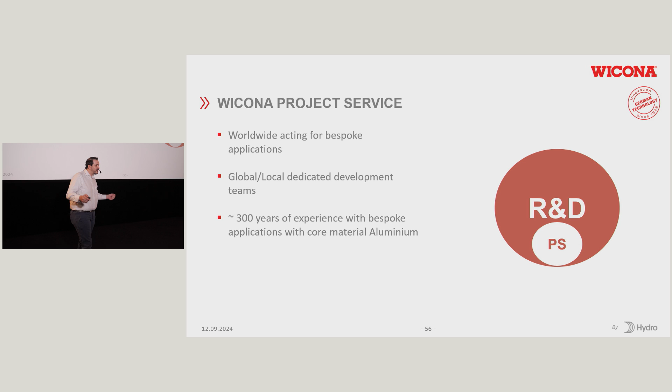In the team, we are collecting more or less 300 years of experience in the business, combining the experience of all the employees. Being part of the R&D of WICONA, we also have the opportunity to use solutions that are not yet developed or officialized in the market before other colleagues.

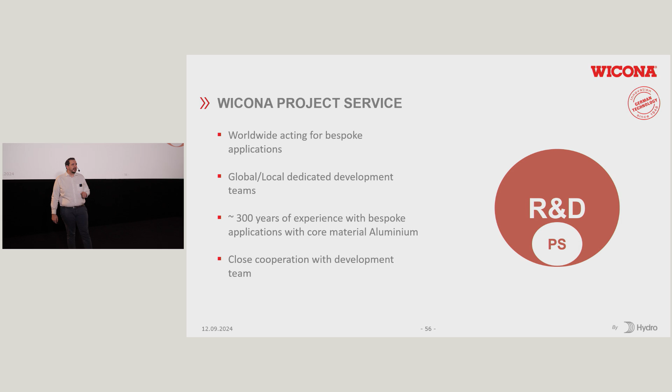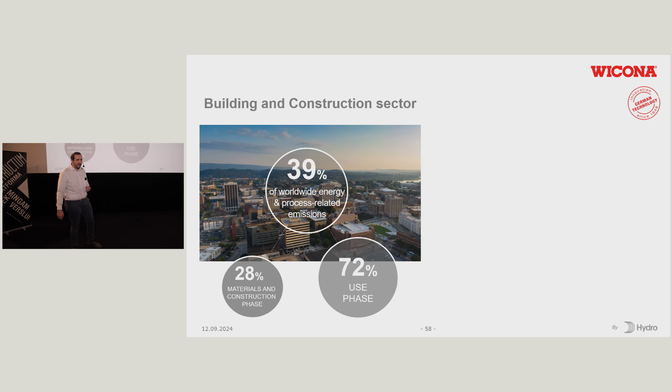But before that, I would like to talk about sustainability, which is an important topic. Before, we were at 37%; in my presentation it's 39%. Importantly, one-third of global emissions are because of our business.

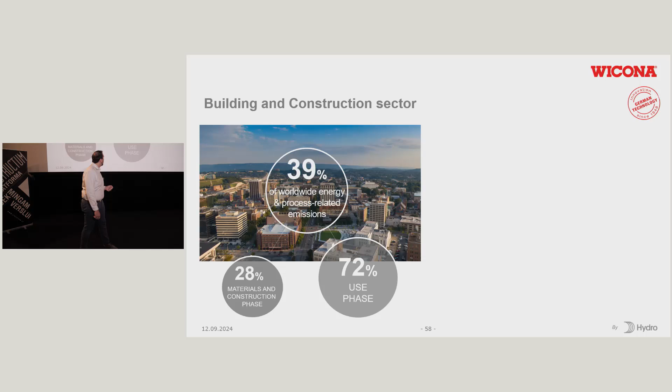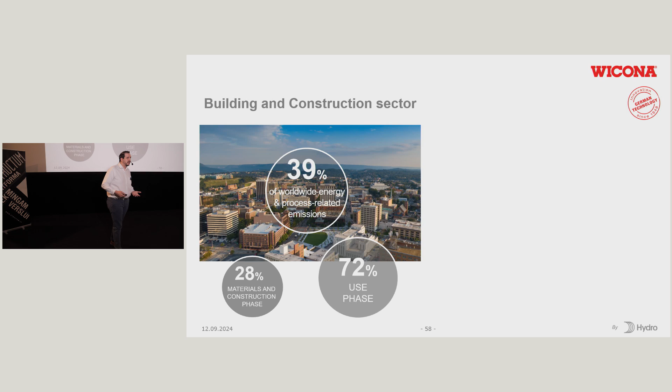Normally it was divided 28% and 72%: 72% for the usage of buildings and 28% related to the production of materials used to build the building itself. Now, with all the improvements we've seen, more or less we are at 50% usage consumption and 50% on the material side.

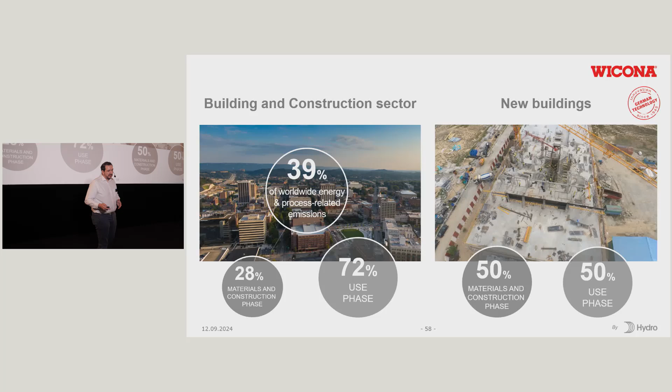Here I have two different projects. This one is the Office of Environment and Energy in Basel, Switzerland, where we have done a nice closed cavity solution, super well thermal performing, U value 0.5, sound insulation 58 decibels, a super nice development, and solar panels on the rest of the building to save energy and produce clean energy for the building. On the other side, we have 2 Trafalgar Way, a project I will explain in more detail later.

That is a passive house building for cold temperatures, meaning the solution we developed is for 0.6 watts per square meter Kelvin. Both of these projects relate to the 50% of usage of the building, improving performance and thermal transmission of the systems, reducing this value.

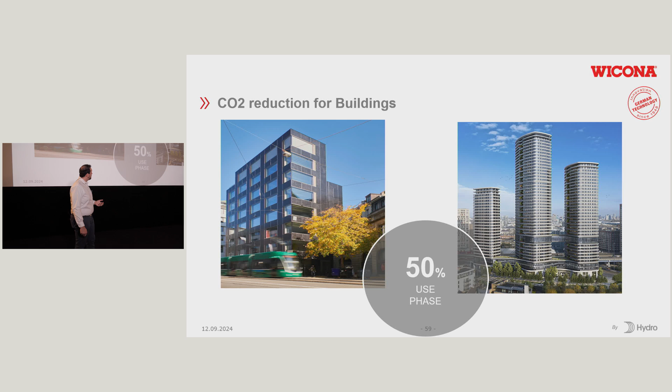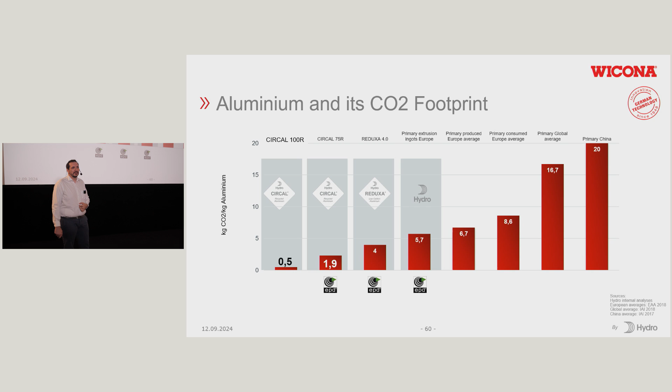On the other side, we also have to take care of the materials we are using. As WICONA, we have decided to use our CIRCAL 75R, which is, as you can see here, a low emission aluminium. We have decided for all the standard series we sell worldwide to use our low carbon aluminium for that reason. We are trying to do our part on this side, and I would invite you to also support us on that.

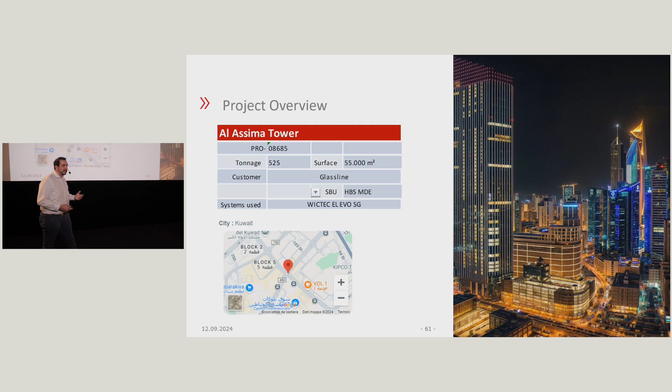This is the first building, Al Assima Tower in Kuwait City, a 310-meter high building with 55,000 square meters... of facade, not including the podium below, which is a different case but was also done by us. Here we have some renderings of the building and some important information.

As you know, floor deflection has a main impact on the design of the system. For this element facade, we considered plus or minus 19 millimeters, meaning the joint between the two elements has to allow this kind of movement. We also had plus or minus 4 millimeters for lateral movement of the element, and a high wind load of 6,000 Pascal, which multiplied by a safety factor of 1.5 makes 9,000 Pascal for the test in the test center.

We had the lamella applied on each element with the lateral wind load of 1,700 Pascal, on in and out corners. All of that was tested based on American standard, which normally requires almost twice as much water resistance as the European standard: we have 2 liters per square meter in Europe.

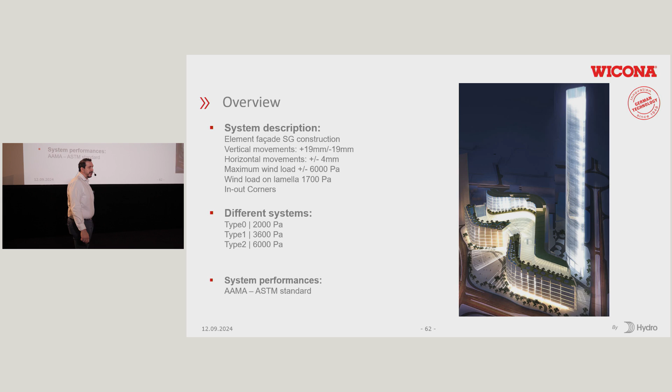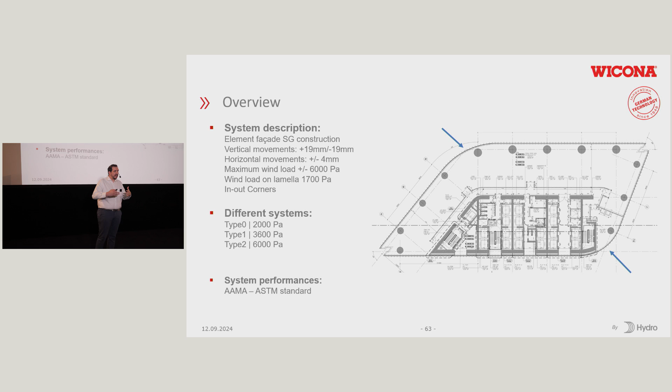In the American standard, we are around 3.5. This is the shape of the building, and as a first step, I recognized that we had some curved elements with different radius. On the outer radius, it was possible to find a polygonal solution where we play with the gasket shape to have straight elements that look curved.

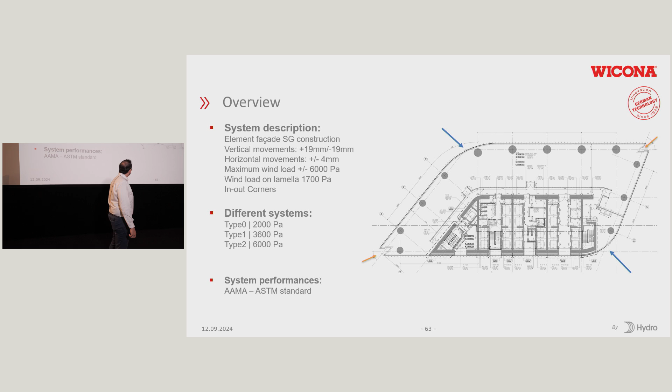On the other side, we did a bended solution element for that. And then we recognized that there were 2 nice corners.

I was going to watch the corners in more detail, and I recognized at that point that also in the corner area we had a lamella taking lateral load. I also recognized that in the initial design there was only a mullion profile considered in that area, and no other mullion profiles.

That was quite challenging from a structural point of view, but spoiler: at the end of the project we decided to split the element like that, also because it was not physically possible to install such a big corner in the concrete with that shape.

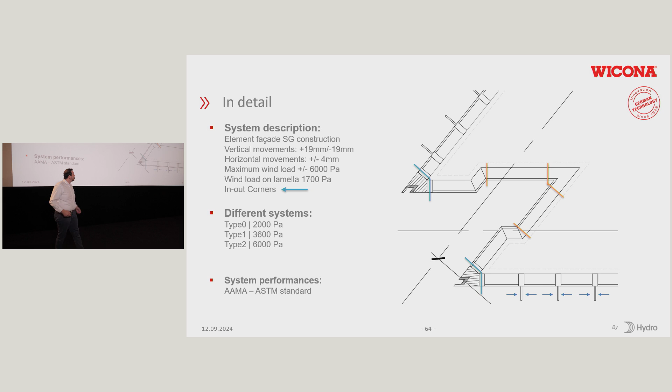Then the first point we watched deeply into were the movements and standard requirements for the American standard. Our gasket system, we know, has already been tested for the American standard and also for the CWCT for the UK, which is more or less similar.

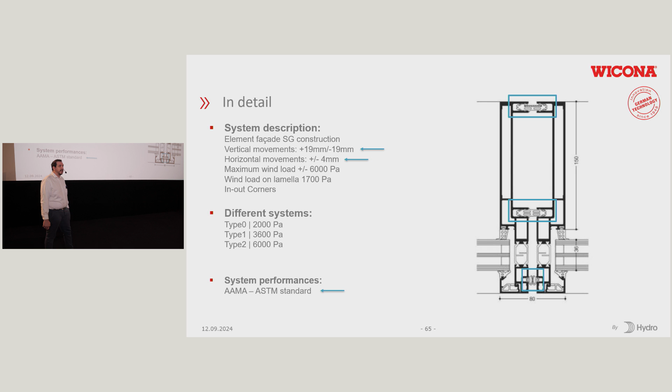For the development of the system, it was important for me to start thinking about the tightness of the facade. The only point was to check if we are able to manage the plus/minus 19 millimeter movements, which are quite high.

We decided to use our normal approach for element facade, the one shown in this video: the element above engages the gasket that is continuously installed on the line below.

Here it looks like the gaskets are quite weak, but in reality they are quite stiff, and during installation they remain quite straight. It's really quite easy, even for elements 2 meters wide, to install the gasket in the proper way.

Sometimes I get requests about how to check if the middle gasket is well installed and well engaged. The gasket has the flexibility to be opened from inside and checked manually just to see if the installation has been done properly. We know this gasket system can allow this 19 millimeter movement.

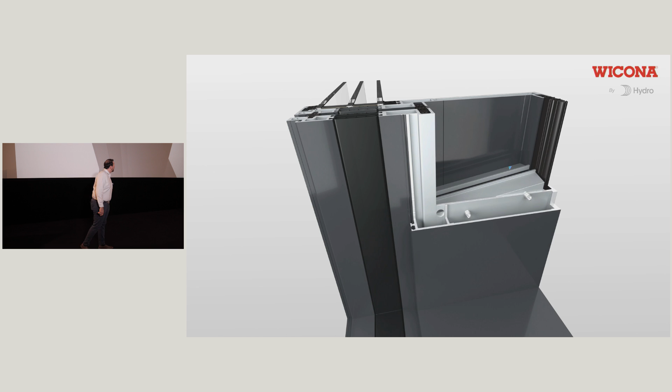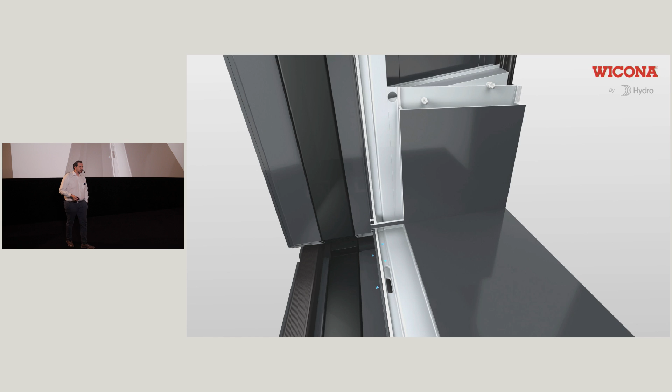We also know we can apply our drainage principle, normally draining the area between the internal and the middle gasket, which should be tight and is tight. But during installation on site, it happens a lot that it's raining and water is stacking in that area, and then it's really difficult to get that area dry afterward.

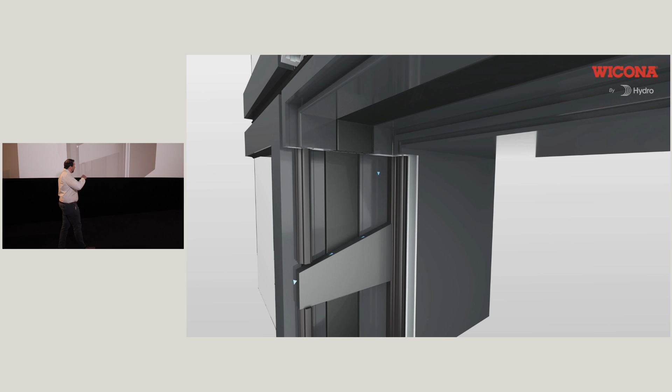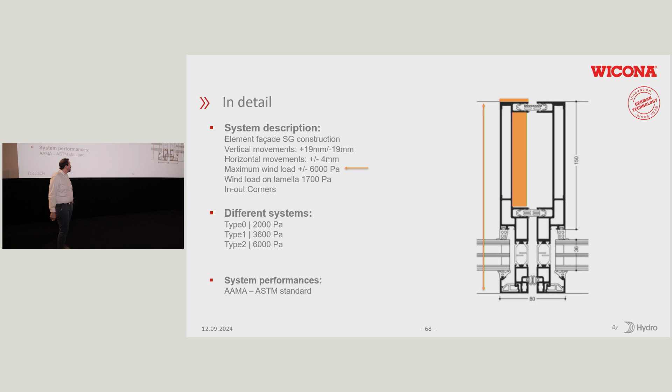With our principle, we are always draining vertically in order to avoid water coming up into the system. Outside we have a foam part that can be compressed and is also draining out the water. Then the second topic I had to check for the development of the system was the reinforcements for wind load and static loads.

Here we have a couple of choices: either we increase the depth of the profile, the easy way, or we increase the thickness on the back of the profile, also possible, or we apply some reinforcement profile.

This also has to take into consideration the lamella applied outside, to avoid the profile twisting, so the solution remains stable.

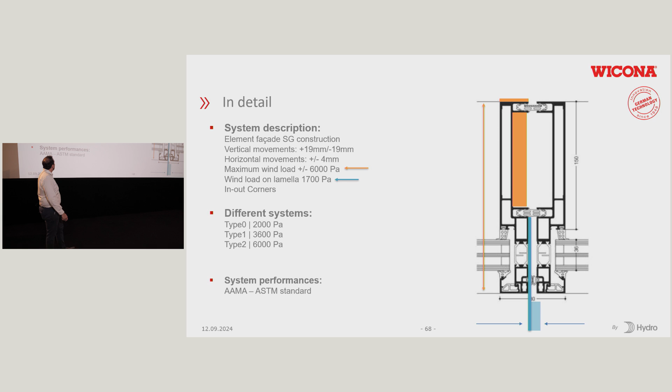Only at that point did we have the possibility to verify how to apply the structural glazing on that, because the project was SG constructed. At this point I've shown you how our gasket system works, and how we developed a technical solution starting from a standard system, something we know and normally use worldwide.

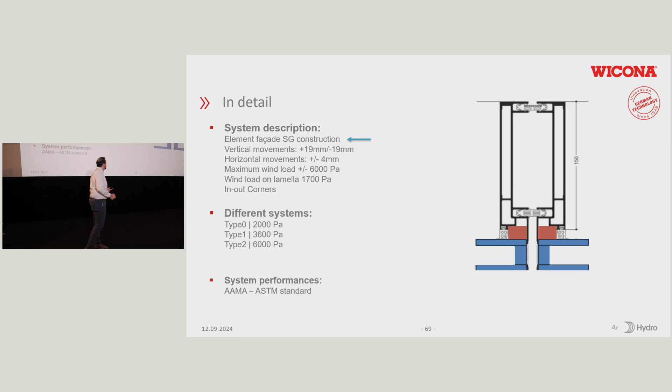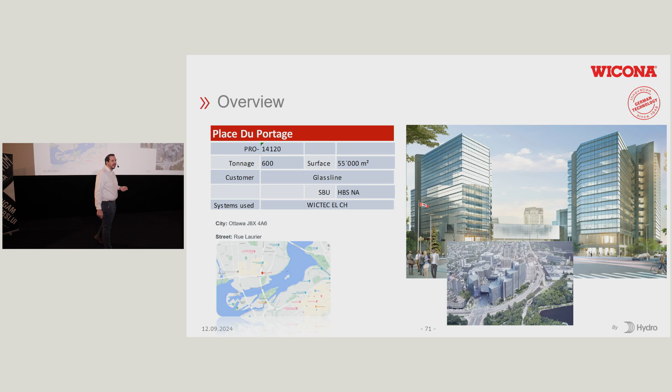This is a project in Gatineau, in the area of Ottawa, in Canada. It's 600 tons, and it's quite a big building. It's a renovation building, and renovation is really important for us, because it's always connected with CO2 emissions, the topic I was speaking about before.

And here also some information, and if you recognize here, the movements are much bigger. We have plus 30 millimeter, plus 35 and minus 30 millimeter, and that means my joint between the two elements must have the flexibility to move 65 millimeter, and that's really a lot.

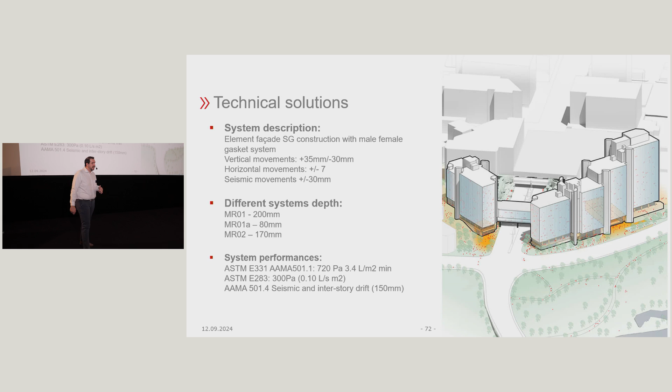Then on the other side, we had also seismic movements, and all the buildings were supposed to be tested for interstory drift and safety seismic test based on American standard. This was the request we received at the beginning.

That's a male-female system, which of course is not aligned with what I already showed you last time in the last project, because we normally use a female-female system, which is only the same profile all around the element. That means we have only one profile and our gasket system compensates the movements.

Here, in this example, we have the green one that is the male part and the red one that is the female part, and based on the movements, they are moving and deflecting together with the building.

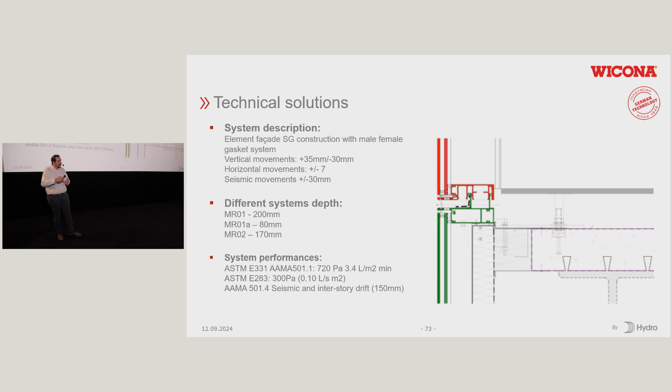And how to transform this one into that one? Because at the end, I know how my gasket system works, and I have to find the right way to have a nice approach for the architect, for the customer, that also performs properly.

One thing I have to take into consideration is that we always use 3 layers of gasket. The 3 layers of gasket give us the possibility to have outside the rain screen, meaning direct rain on the elements is blocked completely.

The middle gasket is the one that is watertight, and then the internal gasket is the one that, in our opinion, has to take care of the airtightness. That is also the one you can take care of from inside the building after installation.

But then if I'm transforming my solution into a male-female approach, then you see where the green arrow is, there I need much more space, because my element has to move up 35 millimeter and down 30 millimeter. And that means I need to increase the depth of this profile.

That means for sure more aluminum, and for sure much more emission. But I cannot do anything else. And then at the end, this visual part of the profile will be bigger.

Here in Europe, a lot of times we have the stack joint in the floor part that is completely hidden in the building from inside. But in the US, in a lot of cases, it's more or less at 800 millimeter from the floor level, which means it's quite a high profile to see.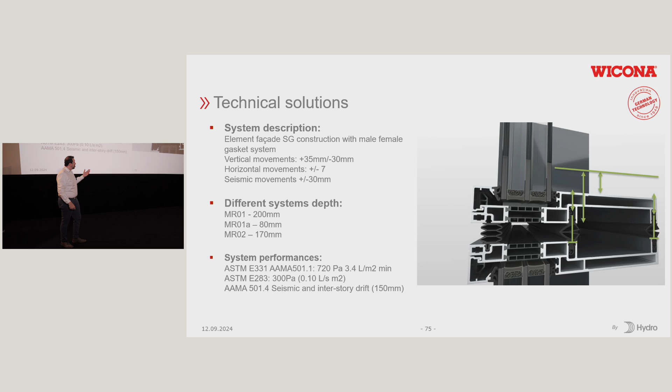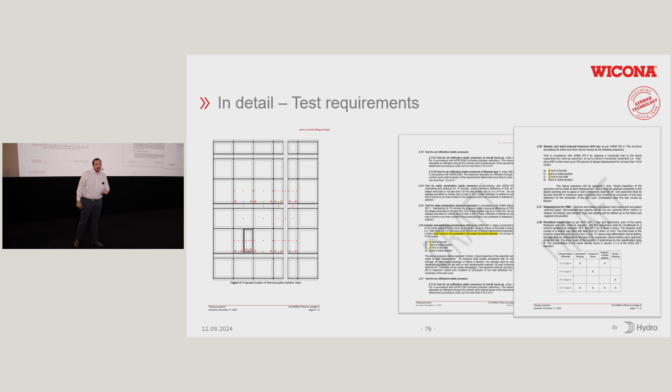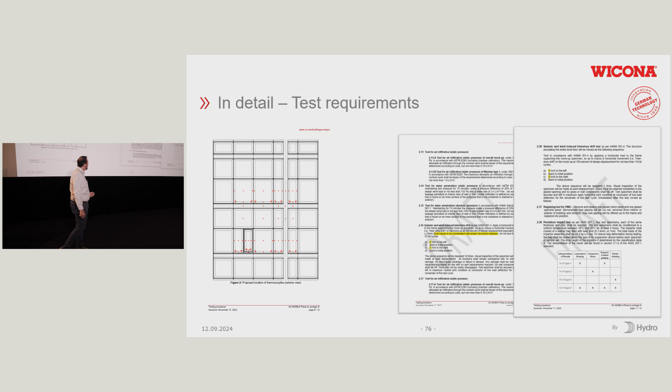That's the disadvantage. Then we had 38 test sequences to run - always the same water tightness, dynamic, static, sucking from inside - I believe he is practical with this topic and knows that. But 38 times was really a lot.

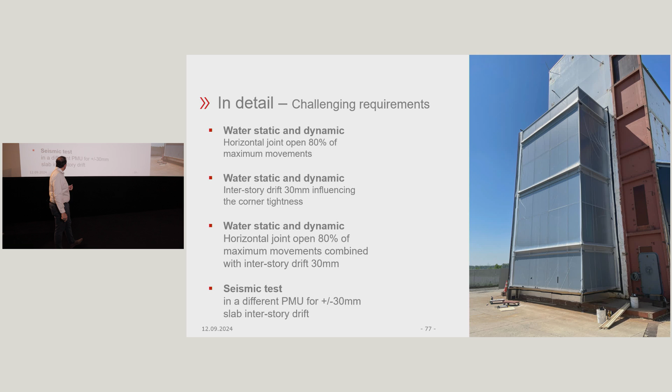This is the mock-up we made in the test center for testing, and we tested the joint completely open at 80% of the maximum design opening. We tested the element with the interstory drift, and both of them together. At the end, we also did the test for seismic.

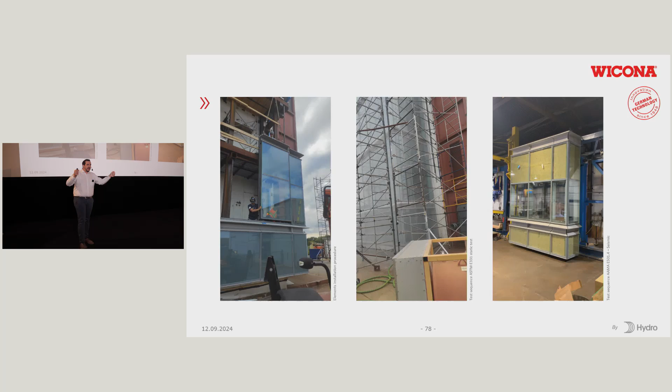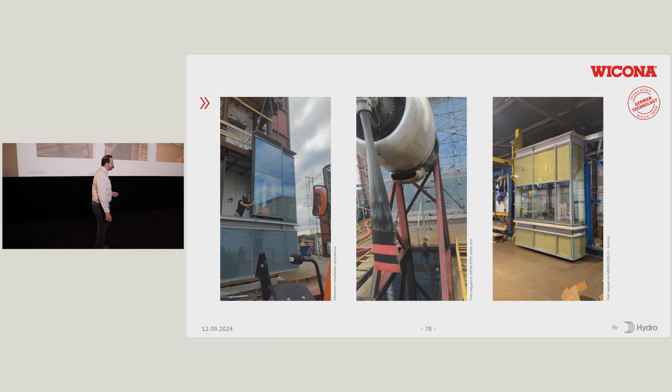Now here's a video of the installation sequence, where the element is engaged on the side and just sitting on the male-female solution. Here in the middle, the video of the American standard water test - you will recognize the amount of water. If you're used to seeing the European test, here is really a lot of water.

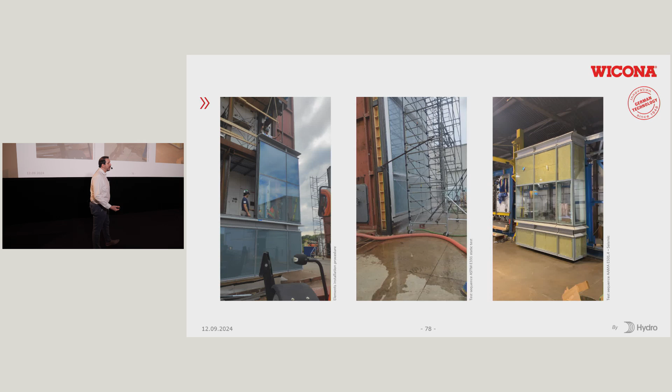And on the right side, the seismic test, and the aim of the seismic test was to have plus minus 30 millimeter movements. At the end, we reached plus minus 75 millimeter because the test center recognized that nothing was breaking, and they tried to play a bit with our sample, reaching the limit they could test with the machine.

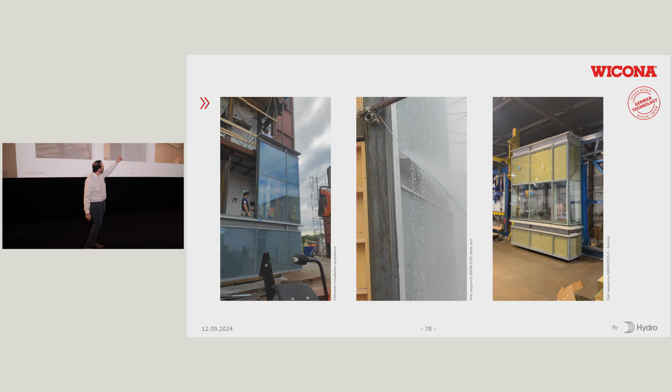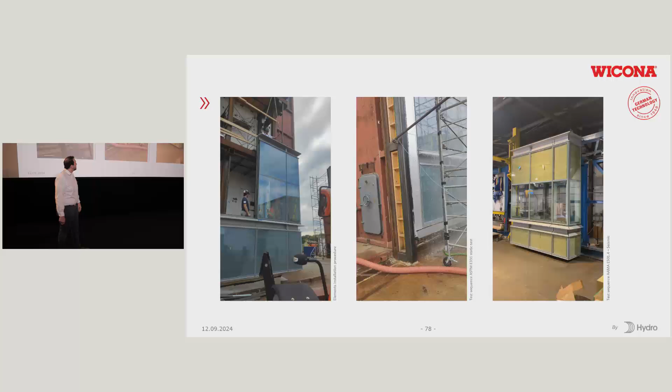And at the end, the only thing removed was a visual gasket that you can see on the top of the video with the yellow panels. That was only visual, no technical need, and what was important for the test was avoiding everything falling down and creating problems.

I have no picture of that building because it's currently in installation phase. And of course, if we have some nice pictures of that, we will share them on our social media channels.

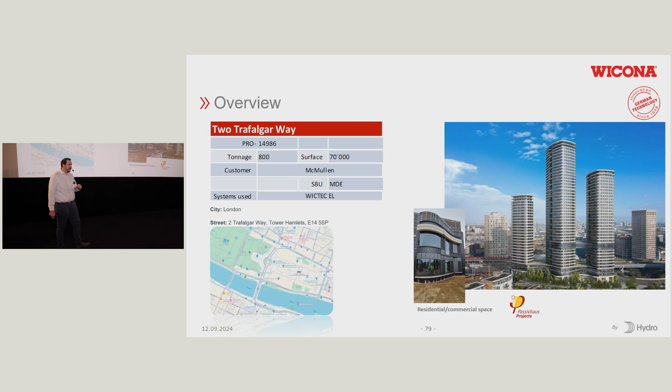Then here, 800 Tons Two Trafalgar Way is the project I was discussing, showing before in the slide. It's a passive house project and is based on CWCT test for the UK market, and passive house test for cold temperature. Here the movements - now you have learned how our system works - we are around plus minus 19, as in the first project I showed you. That means it's not a problem for us.

What was a bit challenging for us was the type of elements. We had straight facade, polygonal facade, and curved facade, which I already showed you how to handle in the first project. But one of the most difficult parts was taking care of the thermal insulation, because the passive house certification requires really high performance.

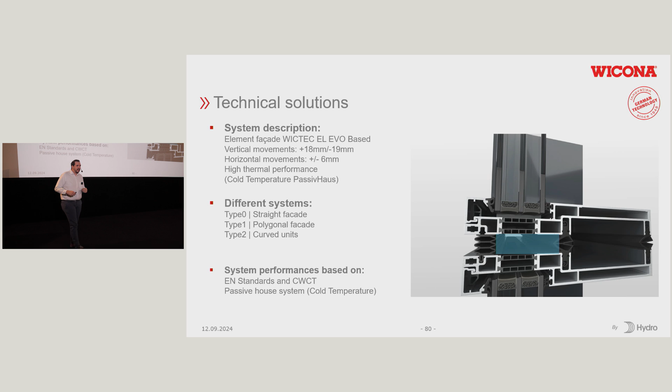We verified in all three positions, plus minus 18 and 19 millimeters, that the thermal performance of the system was always in the same range. We recognized that to reach that value from our standard application, we had to make some improvements. We defined a particular gasket able to be flexible in that area and able to reduce the movement of air.

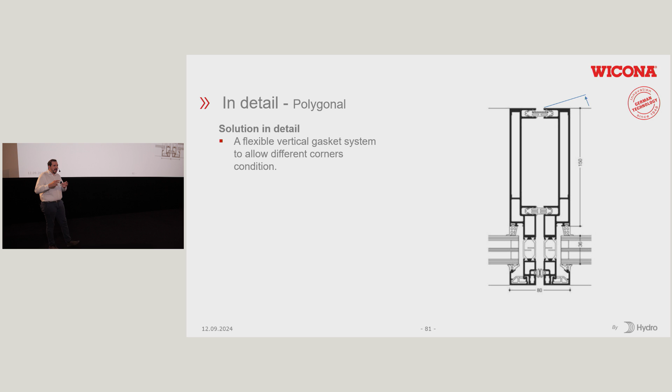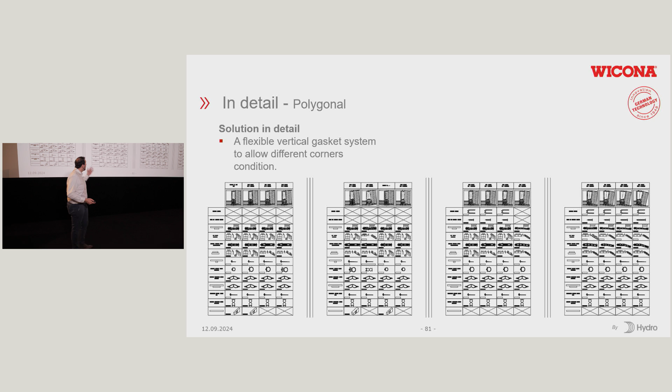For the polygonal system, we played with our gaskets, the internal one and the middle one, and used an adapter profile so we could use the same elements, building the same elements, and add or remove the adapter profile. We prepared for our customer a nice overview for each corner, showing which kind of solution to use in the project. The project was quite big, and we had a lot of different corners.

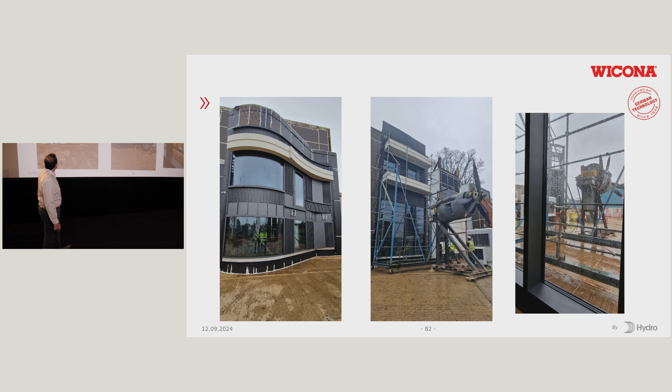Here's some pictures from the test in Vinci, in UK. Here's the bended, the curved element, and of course the dynamic test with the propeller.

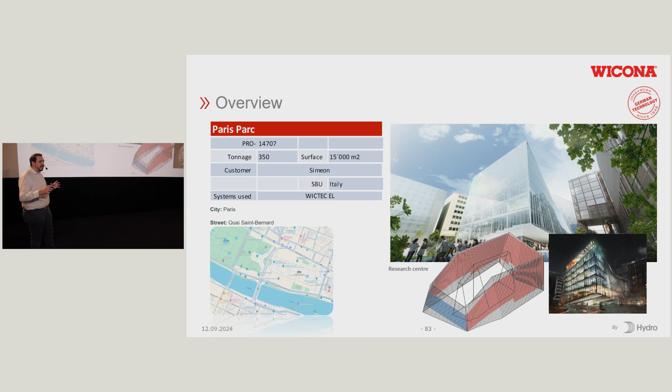Here's the last project. This is Paris Parc, a project in Paris, like a nice diamond in the middle of the city. It's 350 tons, and the nice part of the design is that, in the top corner, the structure moves completely inside, meaning each vertical line goes 0.6 degrees more inclined than the one before. That means the shape of the building goes completely down on that side.

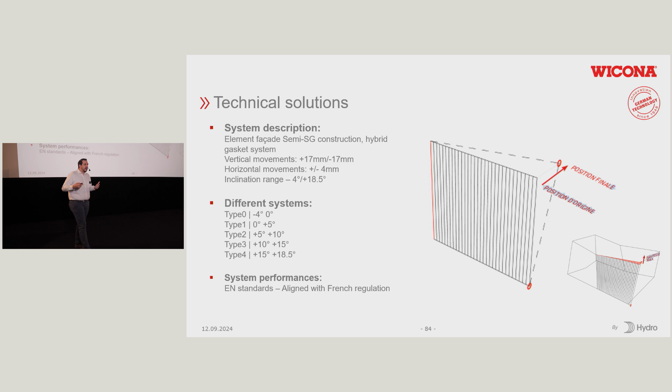To solve this, we developed 5 different sets of profiles that are compatible with each other, allowing us to mix the different profiles and systems we had done. Unfortunately I cannot show you the section of our standard system here because this was developed completely as new. There was no reference, no starting point. We were doing pure engineering to find a way to make this situation work.

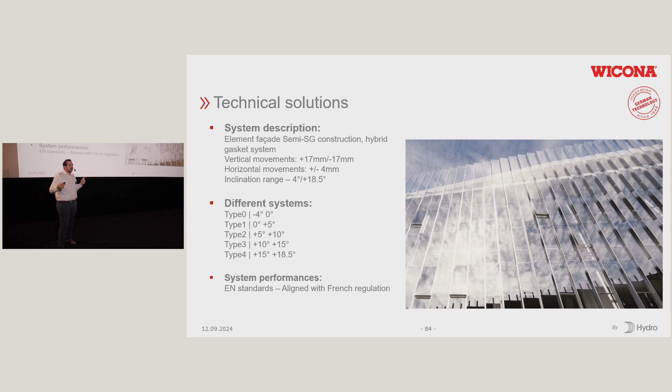At the starting point of the building, all the elements start at the 0 point, but at the top of the building, each line of elements moves inside, with a difference of up to 300 millimeters from one side to the other. At the top, where you can see the red and blue line, we get a bit of thermal bridging, because we had to find a way to solve the thermal part of this situation.

On the outer side, the right part of the elements was getting completely exposed from outside, as you can see here. We had to avoid air creating a thermal bridge, or temperature coming inside the building.

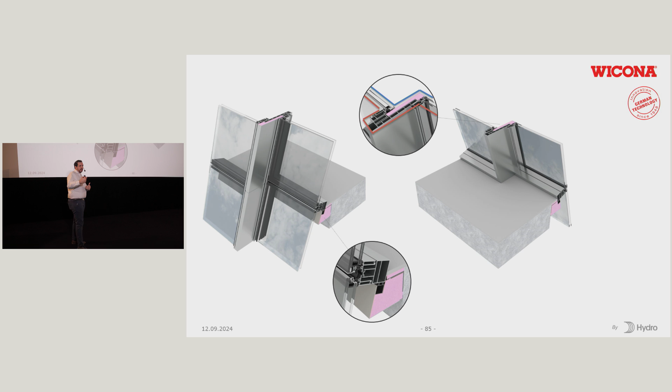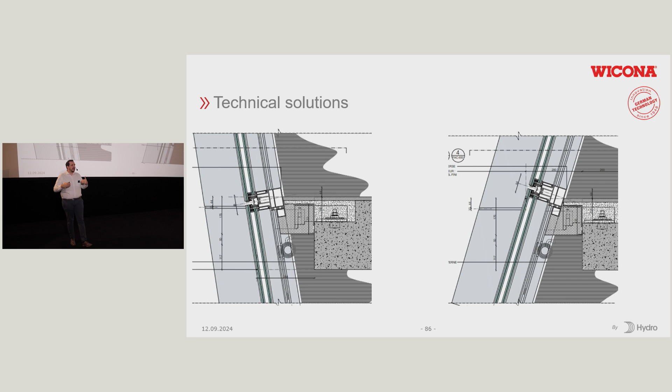Another point we recognized is that all the stack joints were inclined. If you go inclined, one element next to the other will have a different outer line or inner view of the building. So we transformed all the stack joints to be horizontal, in order to have always the same line from outside and the same view from inside. This was a bit more challenging for the customer, for the metal builder, to screw the profile properly, but in the end it was easily done.

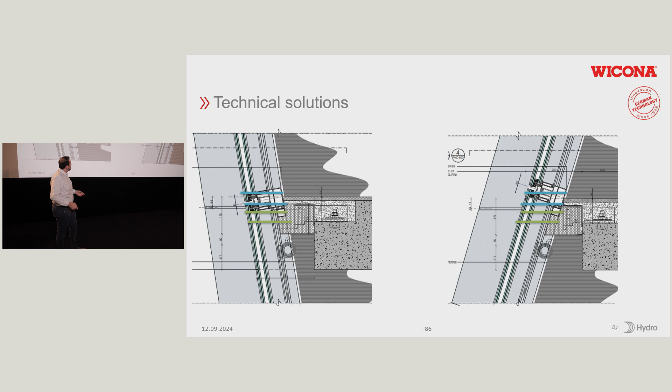As you can see here, this is only the rendering. The architect's wish was to have all the stack joints in the same position. Here we can easily recognize that, despite the different inclinations, we always kept the same stack joint.

Here's some pictures of the test done in July in Italy by the metal builder. The air permeability and water tightness are based on European standard, also the impact test resistance.

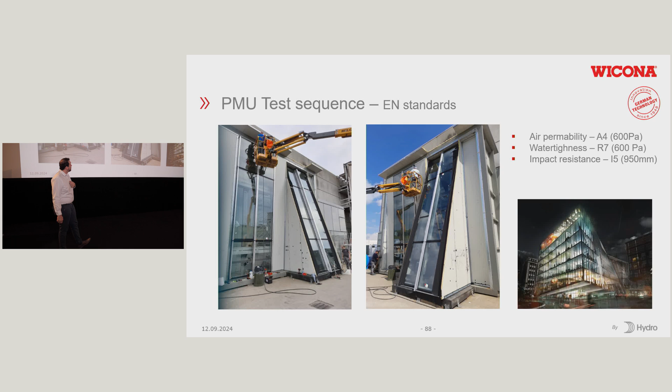I think that's all. I think this presentation was a bit technical, maybe a bit too much, but that's my daily work. I hope you can quickly recognize that all the projects I was showing you are more or less 2,200 tons of aluminium. For projects like that, making the right choice with the right aluminium makes the difference. Okay, thank you very much.